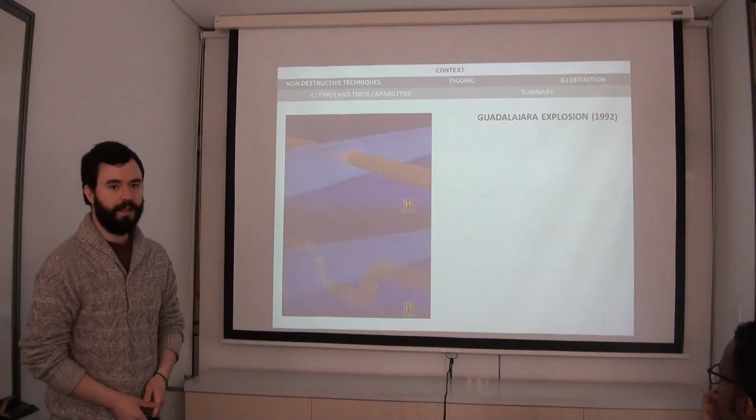Thank you, Camilo. So let me show you this picture. I want you to just take a look and we'll see what happened. This was a real event that happened in Guadalajara, Mexico in 1992.

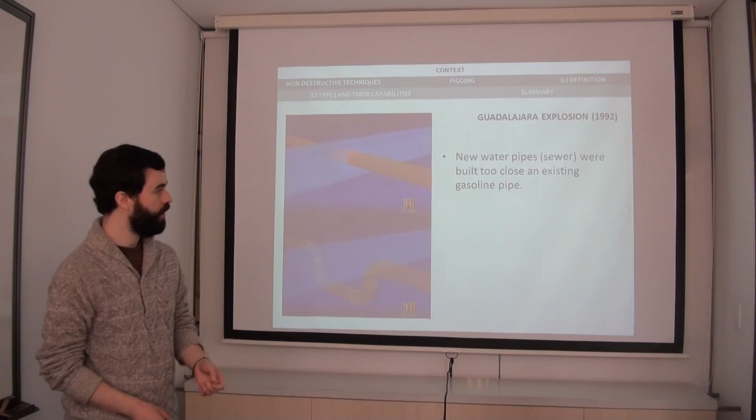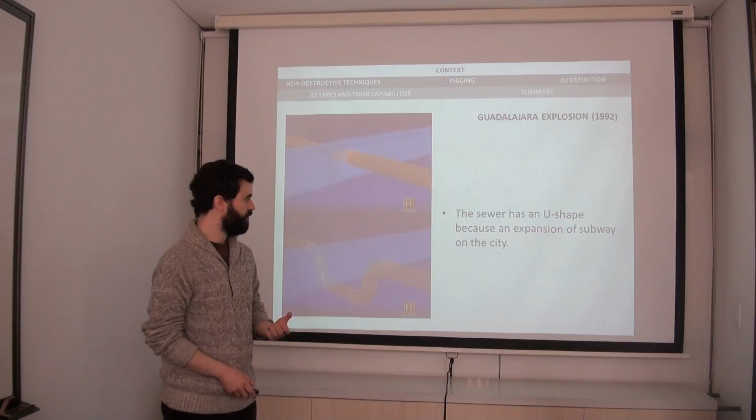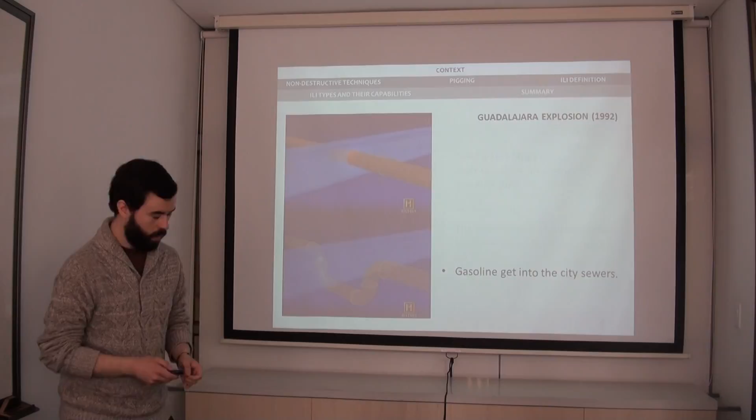It was an explosion. What happened is that the city installed new water pipes or sewers that were built too close to a gasoline pipeline. The sewer had a U-shape because the subway was expanding, and it had to pass through near the pipeline. Because of the proximity of these two pipelines, it provoked a chemical reaction that caused a failure, corrosion, and gasoline got into the sewers. So the gas accumulated in this area and provoked an explosion.

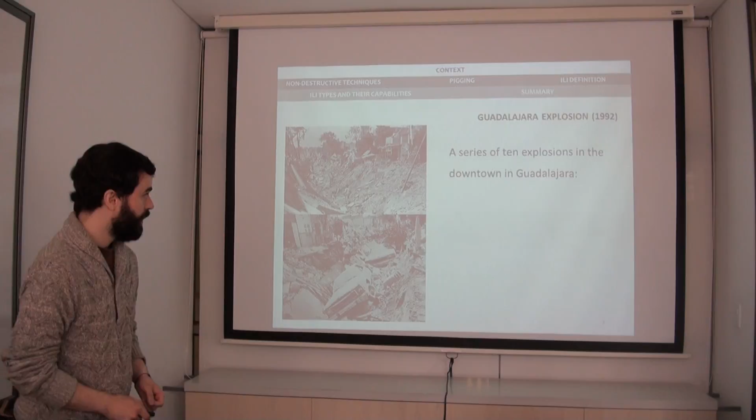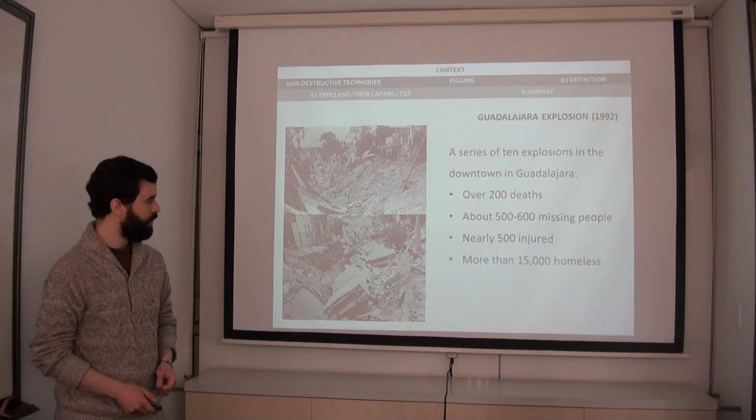Indeed, it was not only an explosion, but a series of 10 explosions in downtown Guadalajara that caused over 200 deaths, about 500 to 600 missing people, nearly 500 injured people, more than 15,000 homeless, and over 300 million in economic losses. However, this is not an isolated case.

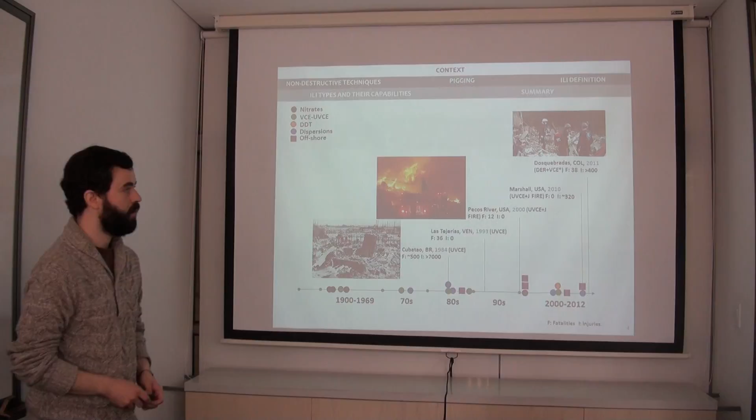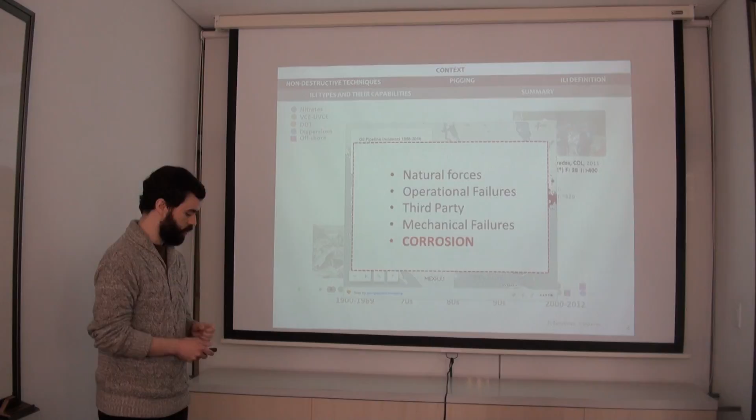You can see this in a lot of sites in Latin America, for example in Dosquebradas, Colombia in 2011, but also in the United States. These failures occur mainly due to 5 causes: natural forces, for instance earthquakes or landslides, operational failures, third-party damage, mechanical failures, and the one I am working on, corrosion. So, are you sure about the safety of a hydrocarbon pipeline, where in this case I mean hydrocarbons like oil, gasoline, natural gas, and related compounds?

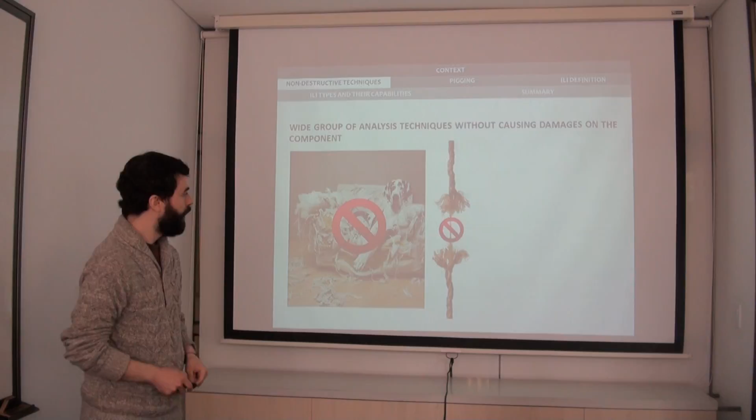So I will show you a technique that I use to prevent these events. Let me first show you what a non-destructive technique is. It's a wide group of analyses without causing damage to the component. Some applications are for failure prevention, system design, and maintenance planning.

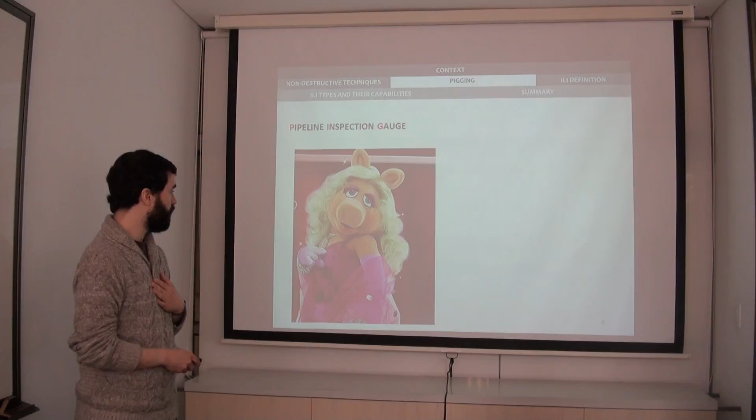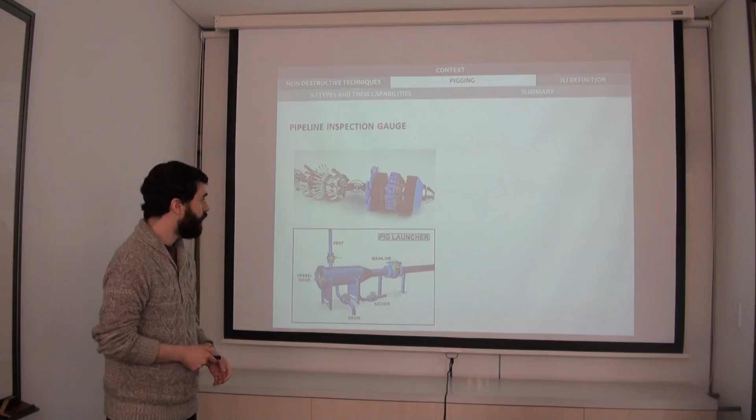So let me talk about what pigging is. I'm not really talking about Miss Piggy, but a pipeline inspection gauge, which is this device. This device is introduced into the pipeline, in a section or the entire pipeline, in order to clean, to inspect, or to map the pipeline route. This latter is very important because due to earthquakes or landslides, the pipeline may move a couple of meters, and because of this, stress could also be a cause of failure.

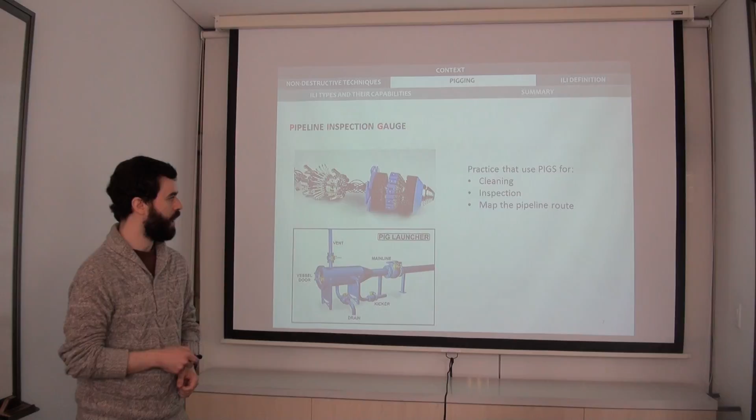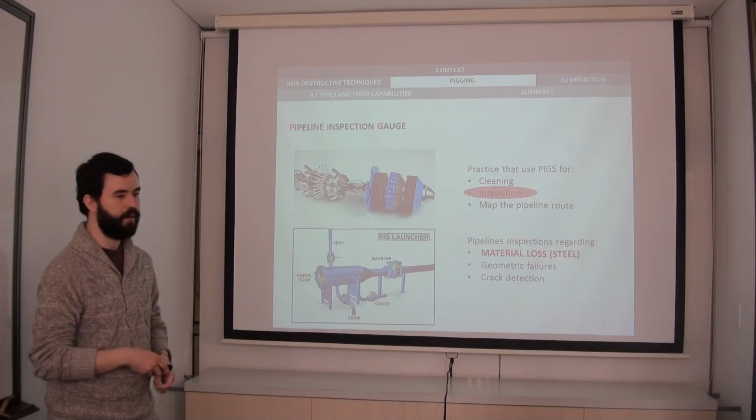If I focus on inspections, there are 3 main issues: material loss of the steel related to corrosion defects, geometric failures, and crack detection. So let me give you some analogies of what a pipeline inspection gauge is.

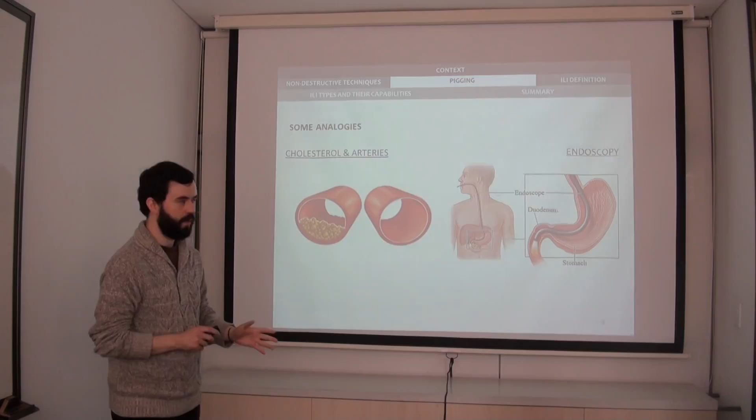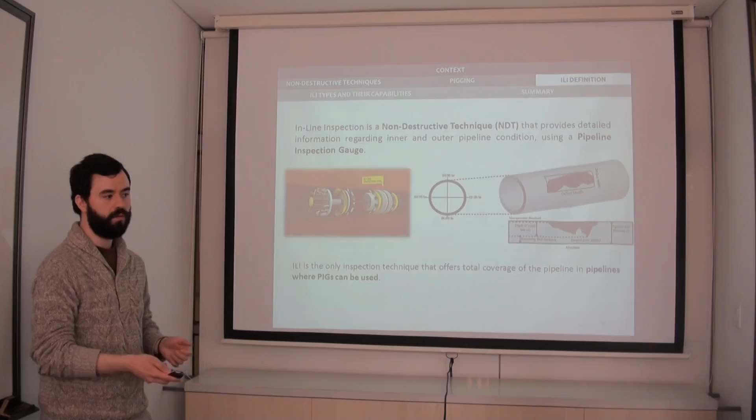It's like cholesterol in arteries: the device both cleans your arteries and performs an endoscopy. So it's a device that lets you do these two things. Let me give you a broad definition of inline inspection. It's a non-destructive technique that provides detailed information regarding the inner and outer condition of the pipeline using a pipeline inspection gauge, as in this case. One of the most important things is that ILI is the only inspection that offers total coverage of the pipeline, meaning not only along the pipeline, but also determining the orientation or direction in which defects are located, as in this case.

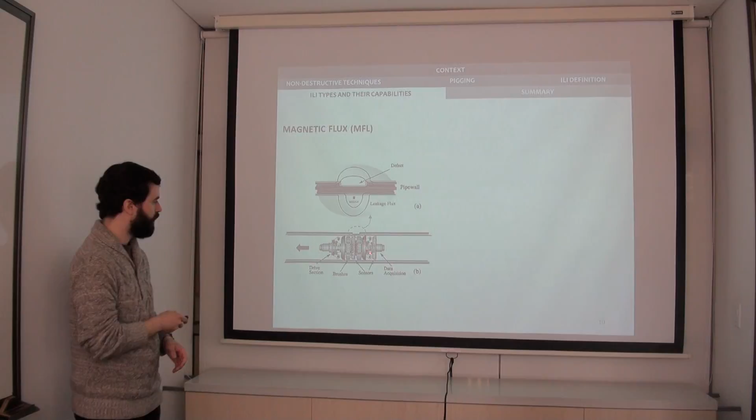ILI inspection can be used to evaluate corrosion evolution if a set of these are used. Let me give you a broad overview of the techniques used in corrosion assessment or material loss assessment based on magnetic flux. The device is introduced into the pipeline and creates a magnetic flux. When a defect is encountered, there is a leakage or spreading out of this flux, and based on that, hardware records the location of the defects.

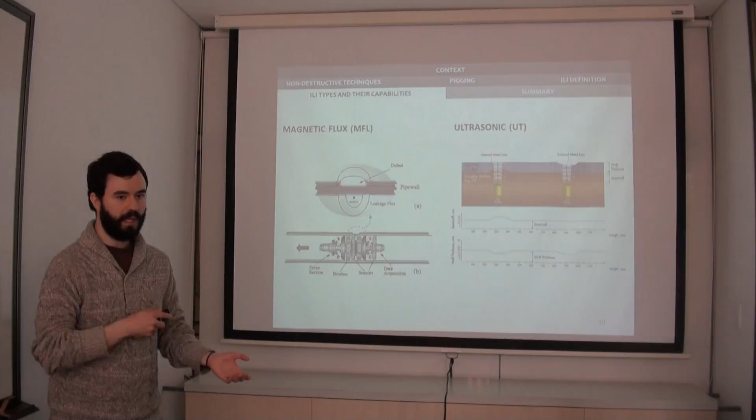Another approach uses an ultrasonic technique based on a set of sensors that emit a signal, and based on an analogy of a mirror—the rebound of this signal—determines whether it's an inner or outer defect. So let's wrap up what I'm saying.

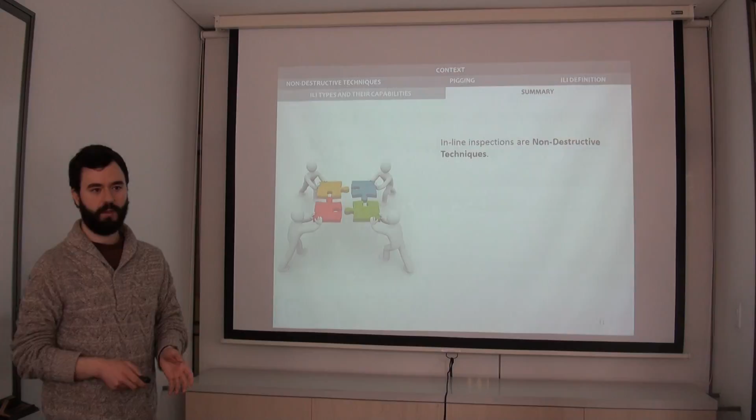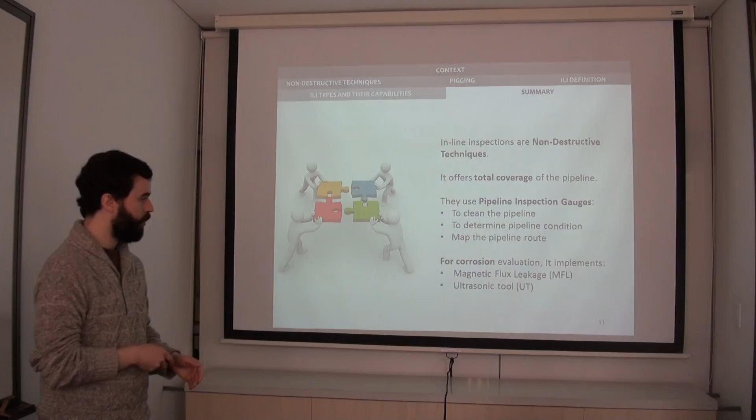Inline inspections are non-destructive techniques. They offer total coverage of the pipeline, and they use pipeline inspection gauges to clean the pipeline, determine the pipeline condition, and map the pipeline route. For corrosion evaluation, techniques such as magnetic flux and ultrasonic are implemented.

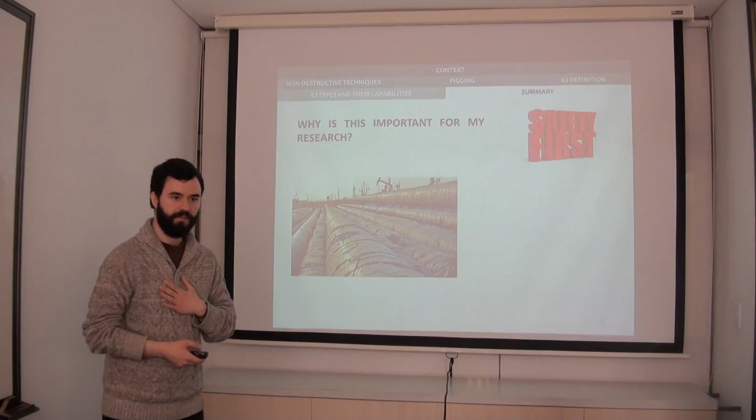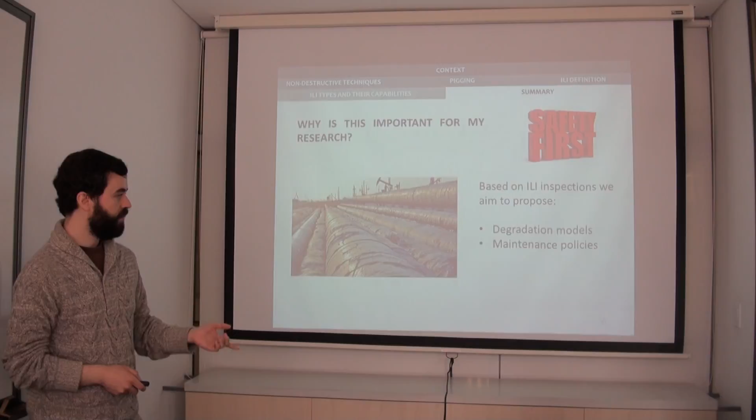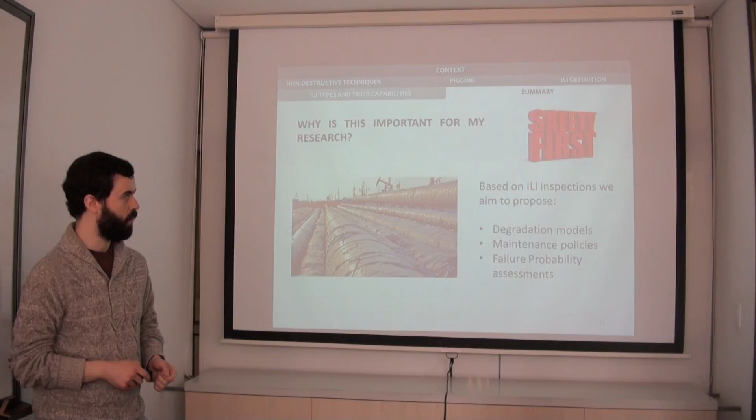So why is this important for my research? I work in process safety and risk analysis, so we aim to, based on a set of ILI inspections, propose degradation models regarding corrosion evolution, maintenance policies — when and where maintenance should be done — and failure probability assessment, in order to prevent events like the one I showed you in Guadalajara in 1992. Thank you very much.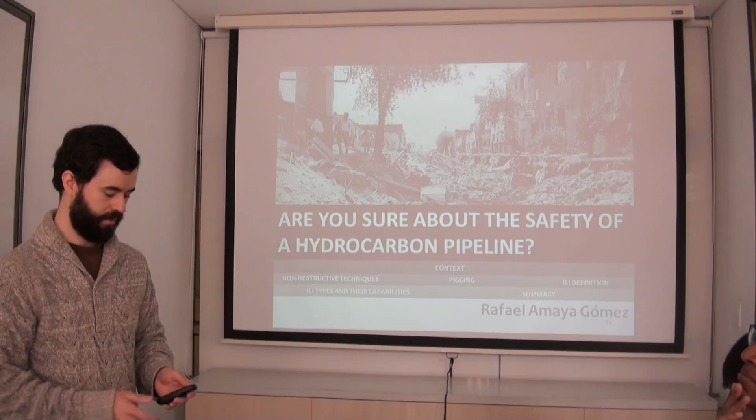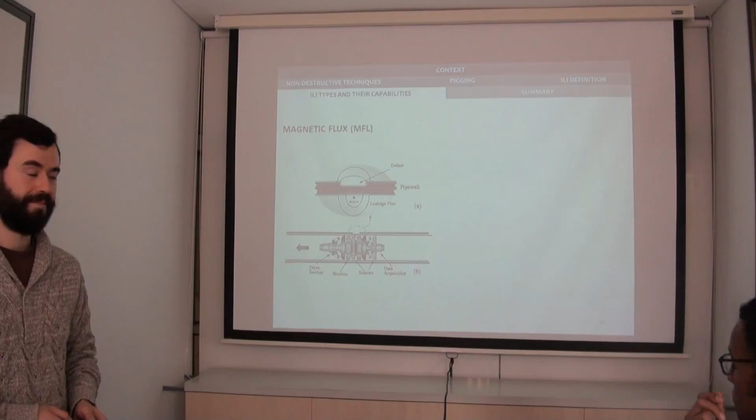So this pig also cleans the pipeline from inside? There are very different types, and one of those is for this purpose. Indeed, here you can see some brushes that both inspect and clean the pipeline. Cool. You install it.